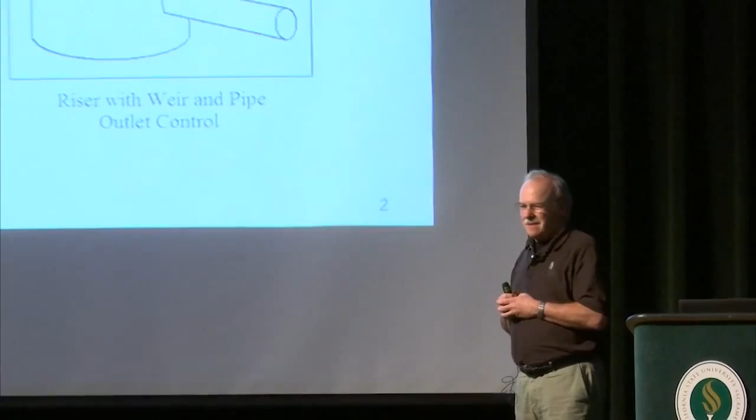Well, thank you so much for coming out tonight. It's a rainy night, and you've come to hear us talk about rain, so I really applaud your dedication. In talks like this, they say you ought to start with a joke, so I went to the internet and typed in stormwater humor, and this is what I got. Anybody get it, undergraduates? I don't either. Doesn't make any sense to me, which tells me obviously stormwater is not a laughing matter.

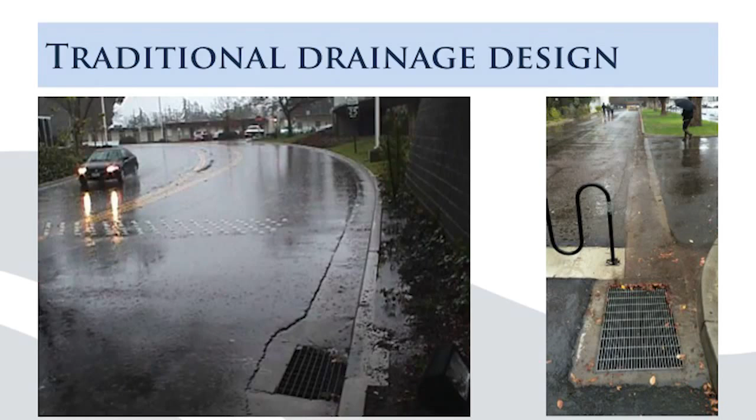And it's not a laughing matter to these folks either - these are the folks in Missouri who were inundated by those really big storms a few weeks ago. I wanted to put this up here because this is not the stormwater we're talking about tonight. I want to make sure you understand we are not talking about floods. We are talking about the rainfall we're getting on an everyday basis, and you'll see why that's important later on.

So what I'd like to do is the first part of the talk here, about the evolution of stormwater management philosophy and thought, and then we'll end with a big case study that Maureen will describe about the stuff we built on campus. Traditionally, civil engineers have... there we go.

Traditionally, civil engineers' design philosophy has been to grab the water as it comes out of the sky and move it as quickly as possible away from wherever it lands. So on a street, we'll take the runoff, move it into a gutter, move it into a drain. Here's another gutter, move it into a drain. From the drain, it's going to go into a whole series of pipes, or perhaps ditches, and then from there.

Get discharged to the nearest receiving water, a receiving water being a lake or a stream nearby. In the extreme, the engineers make the receiving water part of the conveyance system. So here's the Los Angeles River, and it kind of looks like a conveyance ditch, doesn't it? In the 1930s, floods were so bad they really needed to move water quicker out of this LA area than the river could carry it, so they ended up doing this. You might remember this from the second Terminator movie, where the Governator drives the semi-truck down the path.

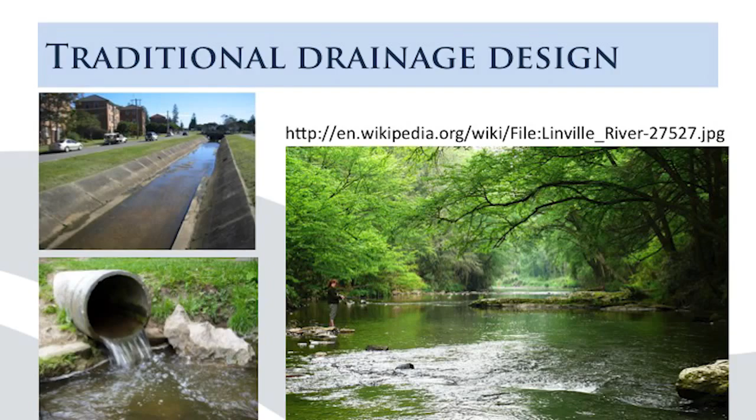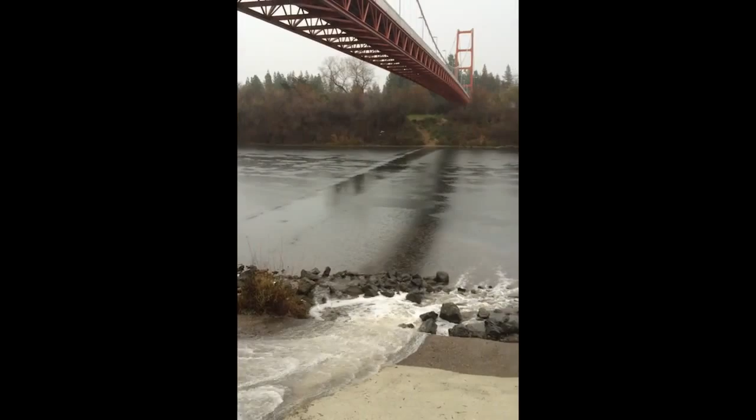Here on campus, this is how we get rid of our water. So all the water from the east side of campus comes to a pump station near the Guy West Bridge, and is periodically just pumped out down to the American River. So you get the picture here: hits the ground, into a pipe, into the river as quickly as you can.

That's the part that's changing. While it's moving from where it hits the ground, stormwater is going to pick up a variety of things.

So this is a little compendium of the kinds of pollutants that we find in stormwater. If there's extra fertilizer running off somebody's lawn, that will show up in the stormwater. People who overspray their pesticides, or even if they don't overspray, if the rain comes too soon after the spray, it'll wash pesticides into the water. Sediment from erosion, trash, pathogens from your dog or from your goose - I guess those are geese there. There's been a great proliferation of local ordinances about picking up your dog poop. This is part of the reason for that.

And then finally, our beloved cars are the sources of hydrocarbons and heavy metals. We get copper from brakes. We get zinc from the tires.

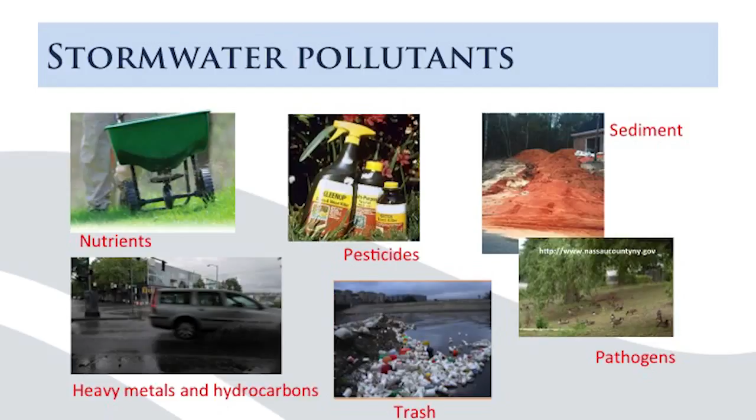On campus, the same kinds of things happen. We have a little turbidity plume over here that I caught one day after a rainstorm. This is a hydrocarbon plume. You've seen these little rainbows in the parking lots after a rainstorm. That's a little bit of oil, a little bit of gasoline leaking from the cars.

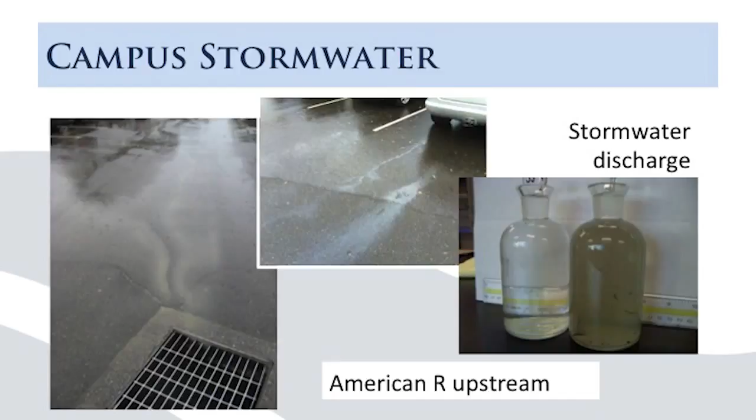And as a result, the campus stormwater ends up looking like this. So when I took this sample out of that same pipe that I just showed you, I went down to the river, went upstream a little bit, and this is what the American River looked like. It looks pristine, and then we're going to put that in it. Well, I'm not going to. We do put that in it.

So what do pollutants do? Well, some of the pollutants are toxic. The hydrocarbons, the pesticides, the metals can be toxic to fish. The nutrients are going to encourage algae blooms. The sediments are going to wreak havoc with local habitat. Trash in the water doesn't look good. And if there are pathogens, beaches close.

So in Southern California, after every rainstorm, the guys go out, they measure microbes in the surf, and if they're too high, they close the beaches. We've spent 35, 40 years since the Clean Water Act in the early 70s taking care of wastewater treatment, and we've mostly got that under control. We've mostly got the industrial discharges under control, and now we're at stormwater. And so today, stormwater is described by EPA as one of the leading remaining uncontrolled causes of pollution problems.

And our local example here is the fish in the American River. The salmon in the American River need clean gravels to spawn. So if we put a lot of sediment in the American River and it covers those gravels, the fish can't spawn. Toxins in the water are going to affect the fish, particularly these cute little baby fish which are very susceptible to metals and pesticides in the water.

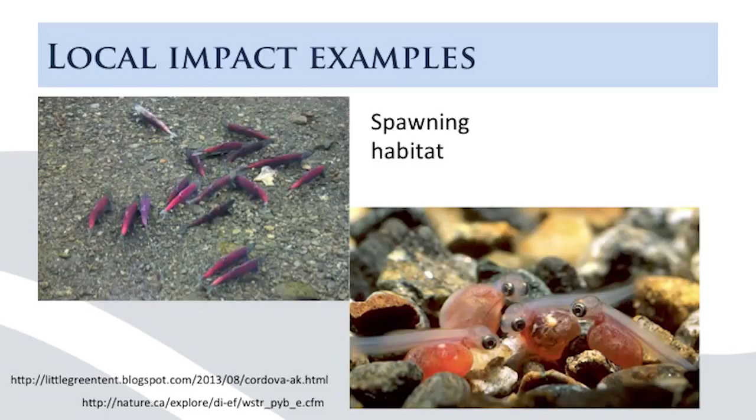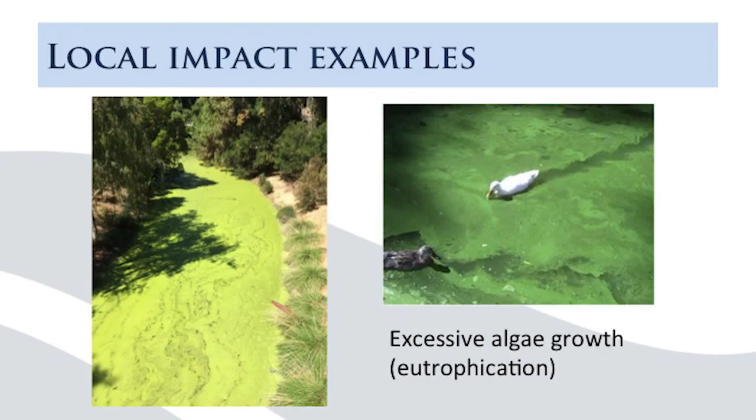At that other university nearby on the other side of the causeway, they have an excess algae problem. If you've ever been to the Arboretum at UC Davis campus, the Arboretum is a long, skinny lake that used to be part of Putah Creek. It picks up nutrients from the campus, naturally running off in rainstorms, and it spurs huge algae growths here. The ducks have to push the algae out of the way to be able to swim through the water.

So engineers, we say, you got dirty water? We know how to handle that. Treatment, we're going to treat it. And so when people started thinking seriously about stormwater quality, they started thinking treatment. And like Dr. Mahmood said, OWP was picked up by Caltrans, said, help us with this problem, help us develop some treatment technologies. And not just us thinking this, but across the country, this is what engineers were thinking. What can we do to treat this?

So we developed a bunch of different things. I'll show you a couple examples since it's a Sac State talk. I'm going to talk about the things that we've done. We helped Caltrans work out some trash screens that are designed to capture litter off the highway. This was a particularly interesting one. This is a well screen that's turned on its side.

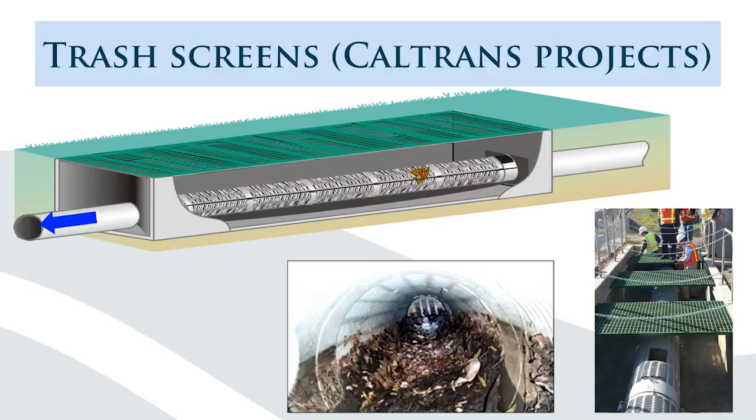And let's see if the animation works. Yeah. The trash and the water come in, the trash is caught inside, and the water goes out, which is just the exact opposite of how a well screen works in the real world. And right here, it gets pretty grody inside of this thing. They clean it out once a year. And you can get a sense of the size of it here.

Up at Lake Tahoe, we spent a lot of time looking at treatment because one of the major contributors to the loss of clarity at Lake Tahoe, in fact, I could say most, and people would mostly agree with me, but a few would argue that there's some algae, but it's mainly small particles running off with the stormwater. From everybody's household, every street running into the lake is hurting the clarity. So we spent some time with Caltrans trying to develop alternative treatment technologies.

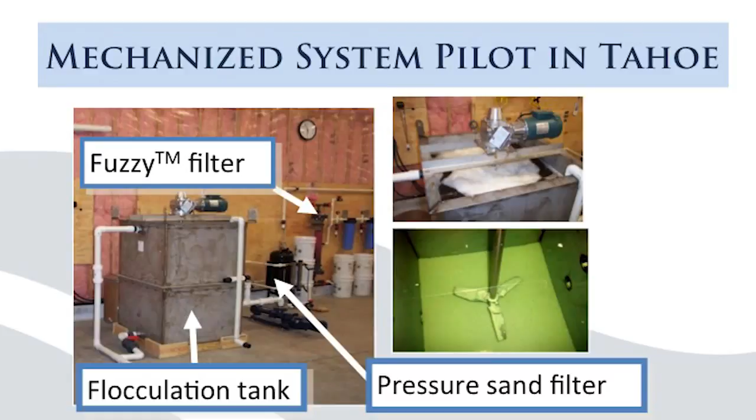This is a really highly mechanized one. This looks like a treatment plant, like a water treatment plant. It's got a chemical coagulation tank. We had a couple different filters that we were trying, and then even some ion exchange, reverse osmosis stuff back here.

We did a lot of work, and when I say we, I mean us and contractors employed by Caltrans. I don't want to take credit for Dr. Curtis there from the University of Nevada at Reno, who did a lot of studies on different media to take out not only the dirt, but also phosphorus, which was thought to be a contributor to algae growth at Tahoe. And you can see up here, it can work pretty well. This sand was so-so. This other media called activated alumina worked really well.

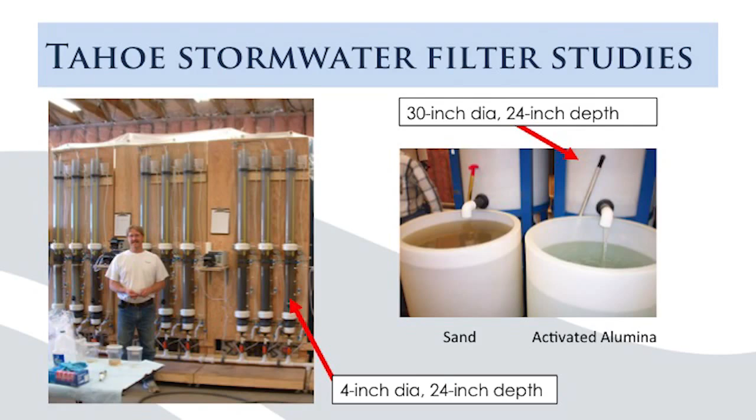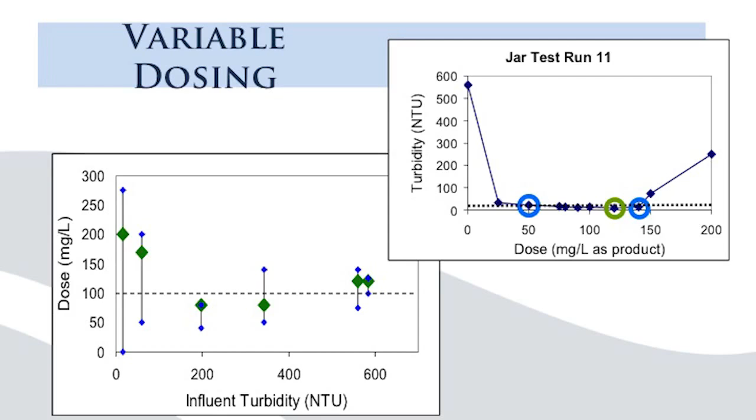So if you're thinking about putting something out on the side of the road and just turning it on and walking away, you got to think twice about that, because you need somebody there to see what's going on.

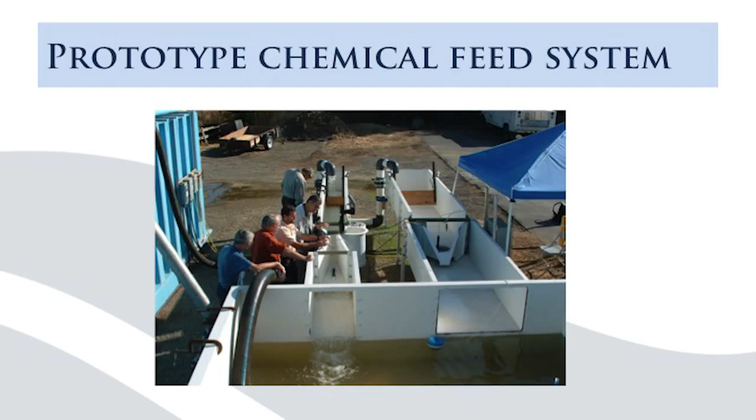Here's a prototype, a chemical addition system. My goodness, there's a flume here, and this was another one, a flume. So you have to measure the water and feed that information to a computer, which is going to turn the speed on a pump so it puts in just the right amount of chemical. It's kind of a complicated device. Great in a treatment plant, not so good on the side of the road.

Keep pressing the wrong button.

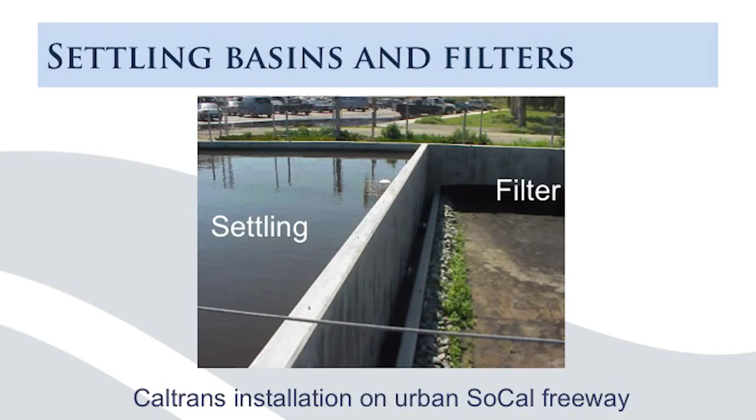And here's a little close-up. This is one that's actually in operation, and it's settling on this side, and the water's coming out toward the bottom of this wall. You can see it's watering the plants here, but it's also going into the sand, and it really works reasonably well. The problem is it looks pretty daunting, doesn't it? It's a big, concrete, expensive box.

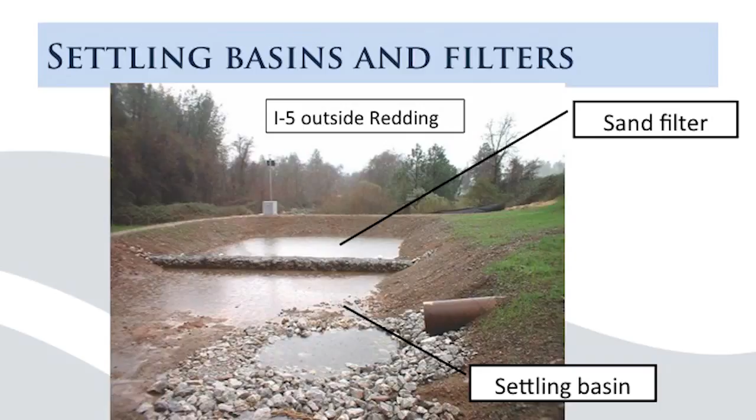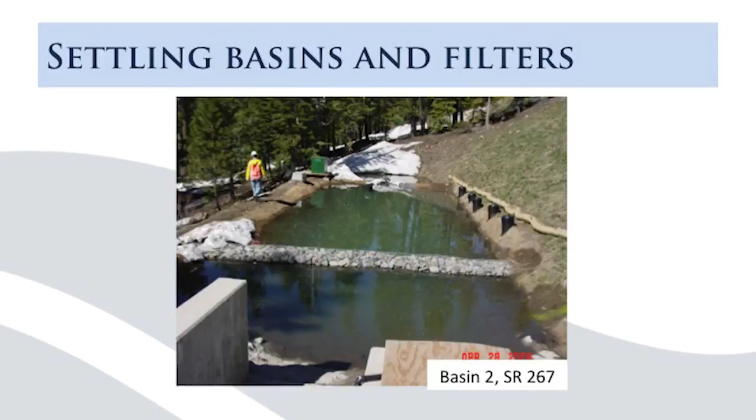All right, so I've kind of telegraphed to you the issues. In treatment, footprint is a big issue. I mean, think about how many drains there are out in a highway system or in a city. Operational challenges. If every storm is different, you need to have somebody nearby or somebody to control it, and that's difficult because how are you going to hire these people? How are you going to get them out to all these different facilities? How are you going to get them up and running within 10 or 15 or 20 minutes when you know a storm is coming? These things are all expensive too.

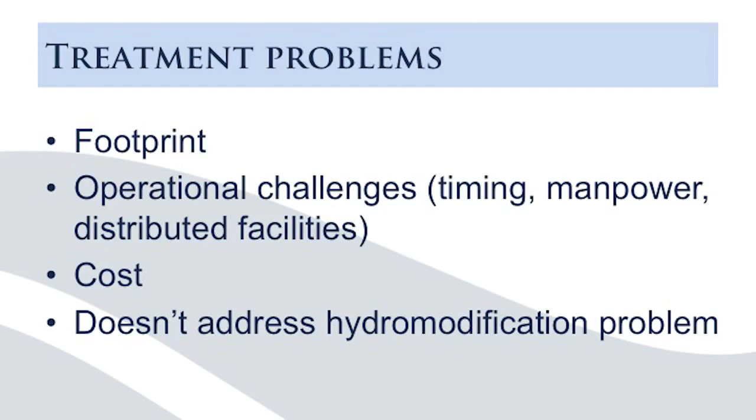And then it doesn't even address one of the big problems, which I haven't told you about. So when stormwater hits and runs off and is sent off to the receiving water right away, it doesn't just carry pollutants, it changes the hydrology of the receiving water. So what I'm talking about here is, if you look at an undeveloped piece of land, rain falls on it, and these are just some typical numbers from EPA, half the water goes into the ground, 40% of it evapotranspirates, and 10% runs off.

We build a city, we put down pavement, we put down buildings with solid roofs, we put down plazas and shopping centers, and now when water hits, very little of it goes into the ground because what we've done is cover the ground with an impervious surface. Most of it runs off, not so many trees, so not so much evapotranspiration anymore.

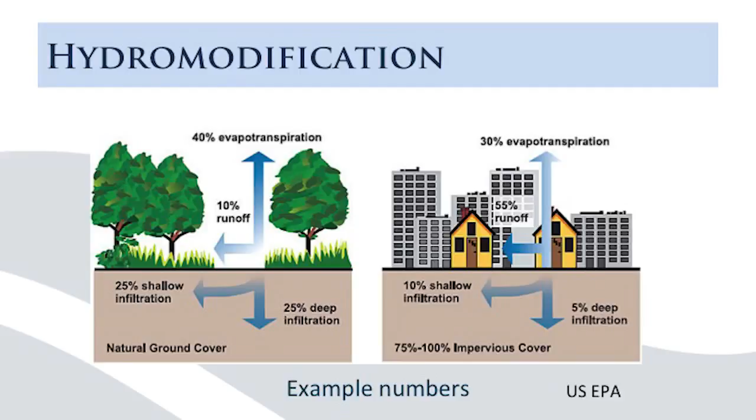For the receiving water, this is the result. Before development, you've got a hydrograph here, which is the runoff flow as a function of time, that climbs very slowly as water infiltrates into the ground and then starts to run off. And then after the storm, it slowly drains away. We replace this with a development, and now the hydrograph looks like this. Bam, right up, bam, right down. Higher flows, faster peaks, faster drawdown, more erosion, more flooding, less infiltration.

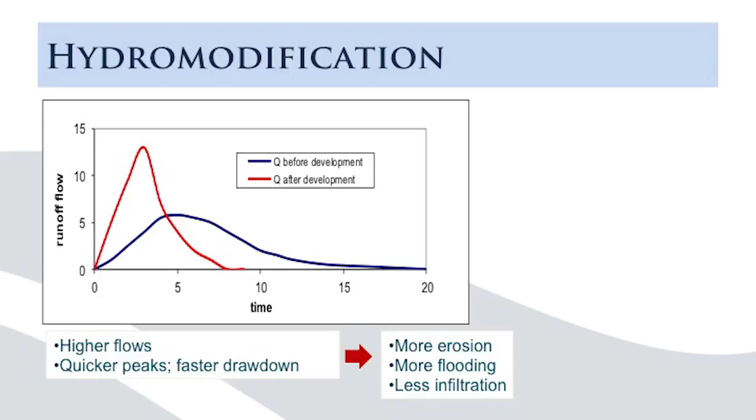So that's a problem downstream because you get more of this happening. So streams that have developed based on old flows, nice and even flows, all of a sudden get hit with these big runoffs, and you start developing erosion problems.

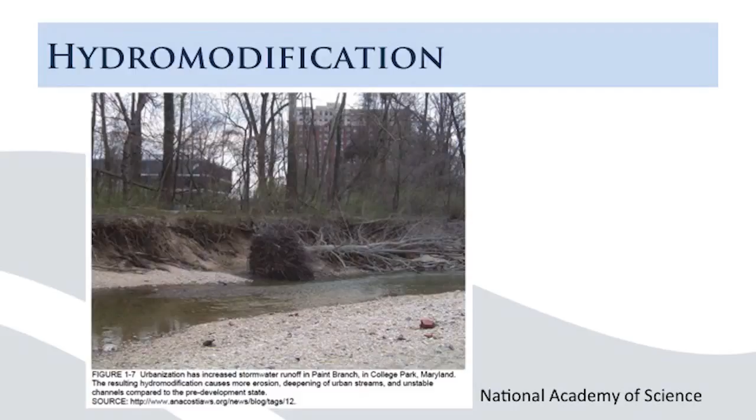You also develop problems the following summer. Okay, so here's a little cartoon that says if we have a pervious surface, grass or forest, the water goes in, there's a local groundwater table, and that groundwater exfiltrates into the local streams. So the streams can run during the time after the rainstorm. I mean, in California, it doesn't rain in the summer, right? But you do see streams that are running year-round, and this is where they get their water.

If you cover up that infiltration surface, the groundwater starts dropping away, and there's less water going into the streams. So all this hydromodification is a bad news scenario for the fish and the other critters in the receiving waters.

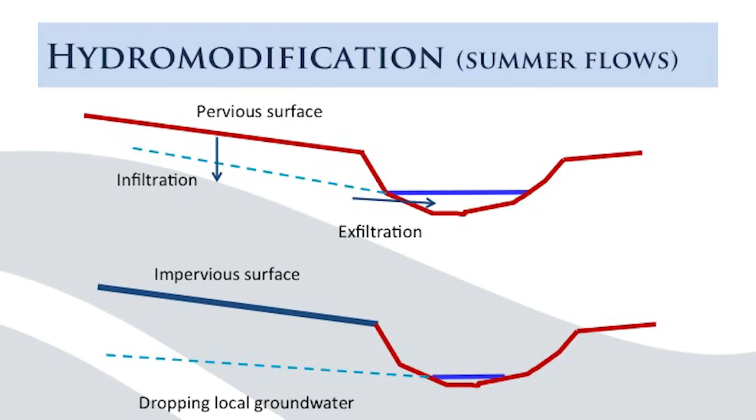So having thought that through, the combination of the hydromodification and the treatment, folks, not just at Sac State, but all over the country, and in fact, all over the world. I recently saw a website from China talking about their Sponge City program, where they want to implement what's called low-impact development. And the strategies of low-impact development are to try to mimic the natural hydrology. So try to get that red line I showed you back to the blue line.

We're going to do that by reducing the impervious surfaces, capturing the stormwater near the source, near where it hits the ground, and trying to infiltrate as much as possible. Where we can't infiltrate, we're going to treat it. And where it's too big to treat, we are going to route it away as a flood.

So I'm trying to tell you that low-impact development doesn't mean we're going to capture all the water and store it in your front yard until your house is flooded. When the engineers are going to design these things, they're always going to design them for a high-flow bypass. And I'll show you some of these pictures.

The reason we can get away with this, or what really makes this work, is the fact that most of rainfall actually falls in relatively small doses. I mean, if I said, what's the average size storm, you would probably come up with a pretty good sized number. But if you take, in this case, 36 years of rainfall in Modesto, and you plot it up so that you've got the cumulative percent of the total rainfall that's smaller than these storm sizes, you get a situation like this where 86% of all of the rainfall falls in storms that are smaller than an inch in 24 hours.

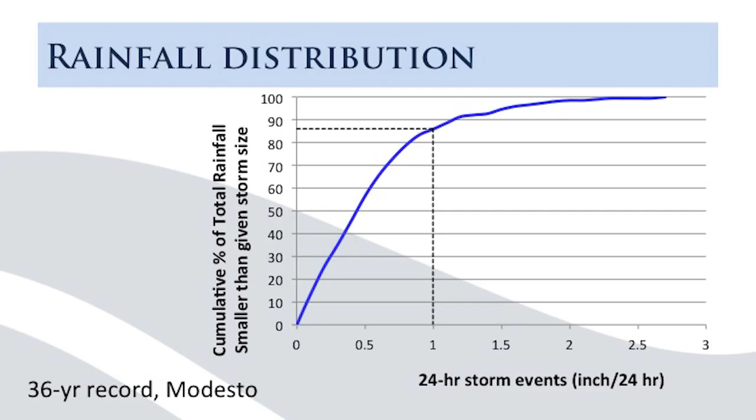An inch in 24 hours is not a flood flow. It's a flow that you can handle with a much smaller facility than a Folsom Dam or a giant storm control basin or flood control basin. And that's what makes us optimistic about LID, because even though we're not going to ever try to get these guys, in here we're going to get 85. We're going to make an attempt to get some kind of treatment on 85% of the runoff.

So we've developed a whole bunch of practices, and I won't go through this whole list because I have some pictures to show you of these, but you might have heard, and you will hear Maureen talk about bioretention and rain gardens. You might have heard people talk elsewhere about green roofs or rain barrels and changing out the vegetation. These are all tools in the toolbox for LID. So let me just illustrate a few for you.

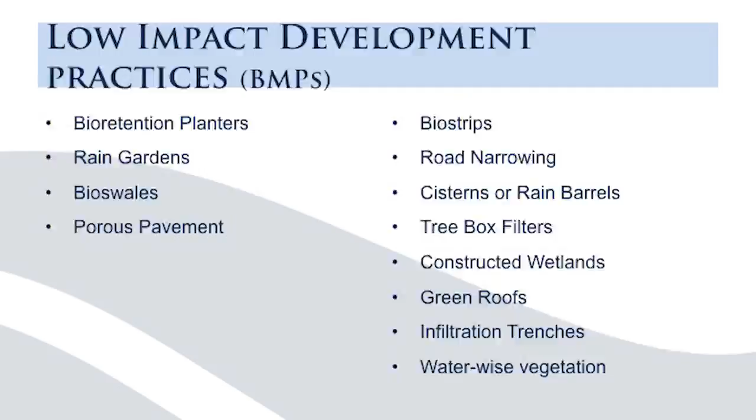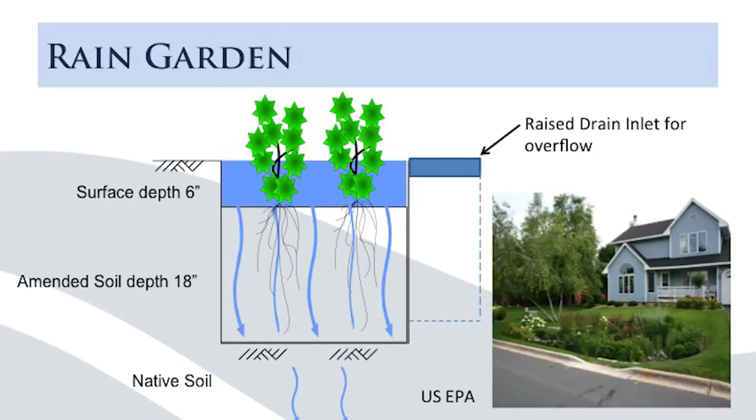A rain garden is a depression that we allow to fill up, and then the water will go into an amended soil, so amended so it has lots of infiltration. So it's usually soil and compost and sand mixed together, and then eventually it will drain away. I didn't catch it, but if it's too high, of course, it goes off back into the pipe system. Here's a rain garden that really is a rain garden. Maureen will show you some others today that don't look like somebody's garden.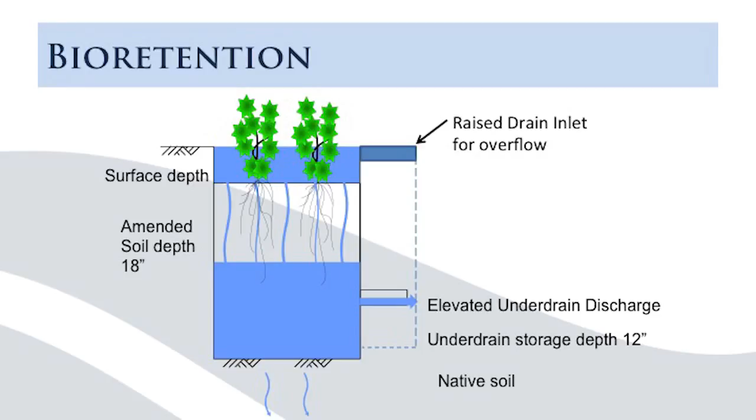But now it's gone through 18 inches of soil, so now we're not talking about dirty water, we're talking about much improved water quality. And any water left on the bottom here will infiltrate away later between storms.

Here's an example of one at a parking lot. The water coming off the parking lot fills up, and if the storm is too big, it overflows into the drain here. The underground pipes attach to this drain box as well.

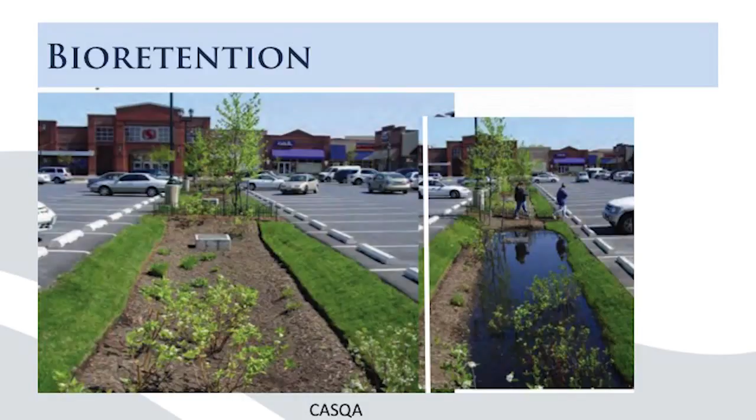You could do these on a small scale basis. If you're in the middle of San Francisco, it's going to be tough to build some of these, so you might just do them in terms of planter boxes. Same idea: there's an underground drain and some filter material.

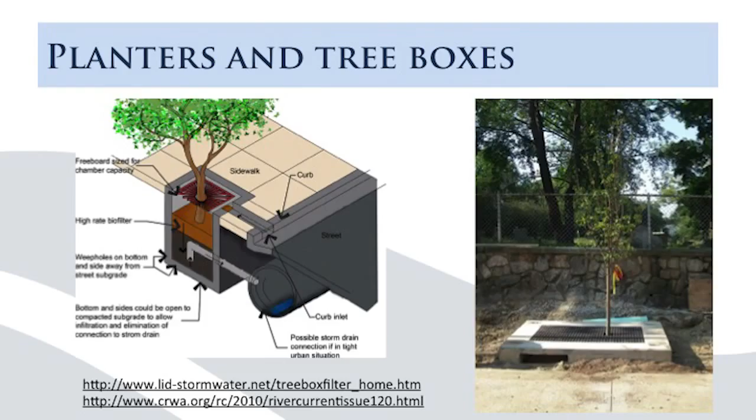Or if you're really pressed for space, you might actually just do it with a single tree. The water comes off, down through the tree, gets caught by the pipe, and off to the drain system. But the difference is it's been treated now through 18 to 24 inches of filter material.

Now, we said reduce the impermeable surface. What if our pavement, our impermeable surfaces, actually let the water through? People have developed what's called porous pavement, and of course, concrete pavers.

We'll show you a video of this later on. This is great, it looks like popcorn. It holds substantial loads—not high traffic loads, but parking loads, plaza loads, walkways—and water pours right through it.

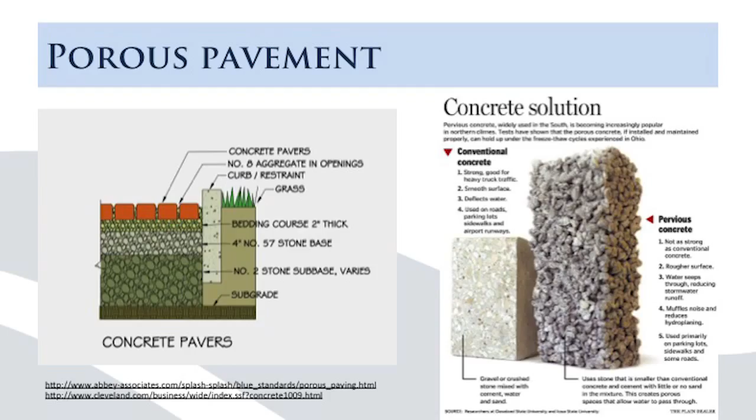You see where we're going here? Capture the water, let it infiltrate.

Over in Davis, where I live—so I have examples from Davis because I happen to live there—they don't even bother with the pipes. They just run the water across the surface and into designated areas on the ground.

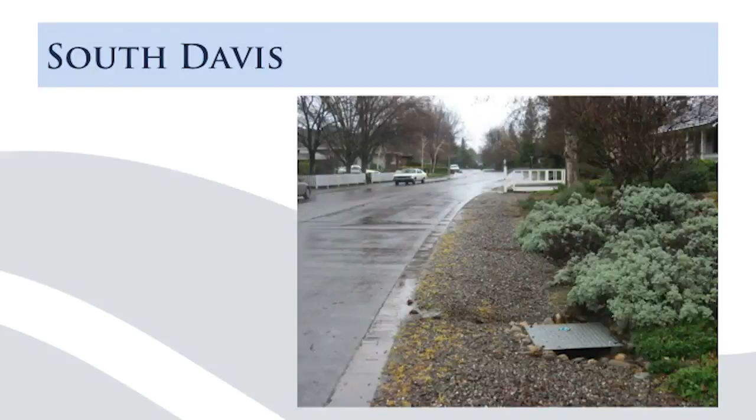So are all the problems solved? Well, I mean, it looks good. No, there's still problems—there's certainly questions here about treatment efficiency and BMP design details.

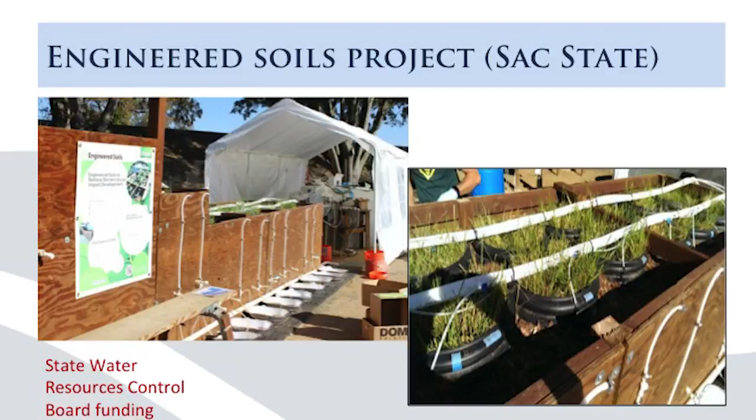At Sac State, we just did another project, a Proposition 84 project on engineered soils. What we did is we built some little baby filters here in a big box, and we put different soil materials in each one. And then we ran stormwater through it.

So in a storm, the professor gets to stand underneath here and look at the pumps, but the students stand out in the rain and collect the samples. This is influent—this is the untreated water. Here's the treated water.

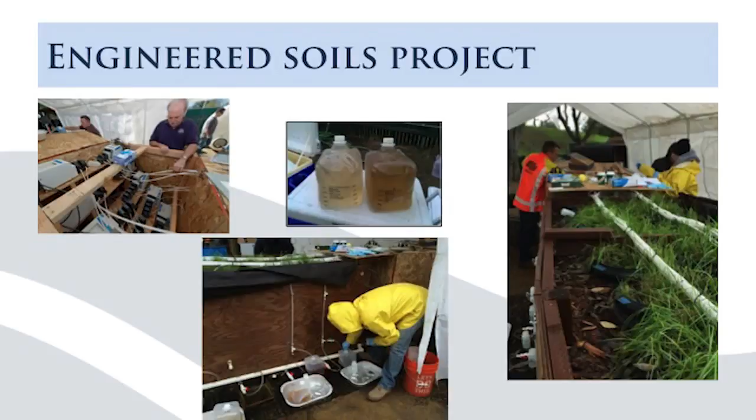And what we were looking at is different materials for this brown layer, and we were looking at this white layer. You remember that activated alumina stuff I showed you at Tahoe? It's really good about picking up phosphorus, and that's what we were trying to do. So we were looking at phosphorus reduction, and then we were looking at low elevation outlets versus high elevation outlets, which make an important difference in nitrogen removal.

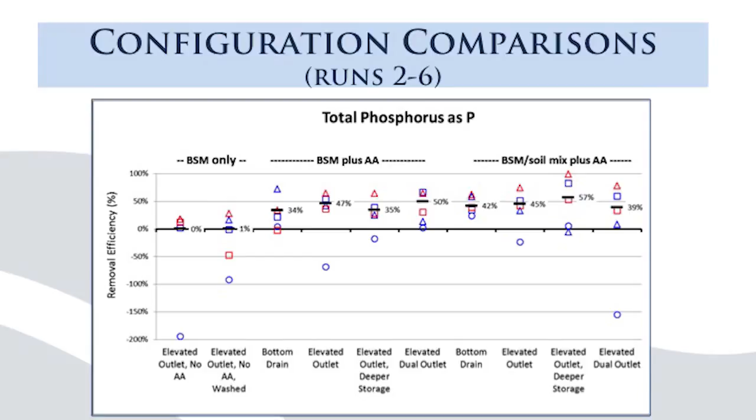I won't tell you much about this in the interest of time, but basically, look, there's no AA on these guys, no removal. And all the ones that have AA, here's the removal rates: 50, 60, 40%. On the nitrogen side, the bottom drain has no nitrogen removal or low nitrogen removal, while elevated drains have higher removal rates.

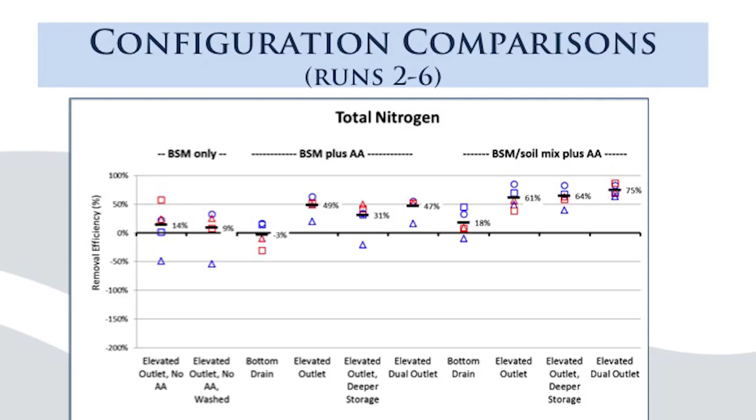So this is the kind of data that we collect that are going to help us refine our designs in the future.

The other really big problem, and I'm going to turn it over to Maureen now to tell you about this, is the fact that we've got a whole city here that doesn't have this stuff. And the question is: is it going to be easy to put in or hard to put in? That's what we were trying to do here at campus. So let me turn it over.

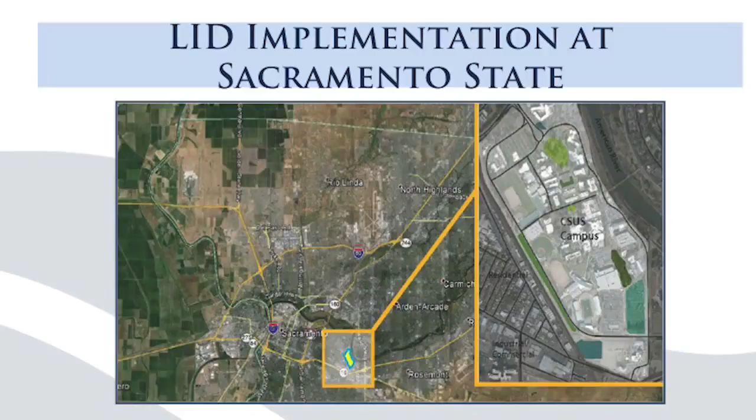And that stormwater, at least on the east side of campus, is all brought together and discharged here. We had that really cool video we saw earlier, right into the American River. Over on the east side of campus, it goes to the river; west side of campus goes over to the west ditch, which eventually ties over to the city storm sewer system.

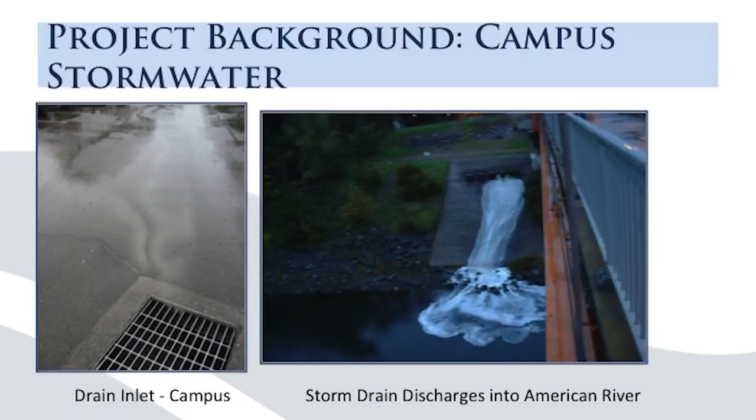Okay, so then once we've collected all the stormwater from campus, it goes out through the outfalls at the Guy West Bridge, into the American River. Now, the American River is really known for its pristine, beautiful water quality. It's really pretty good overall.

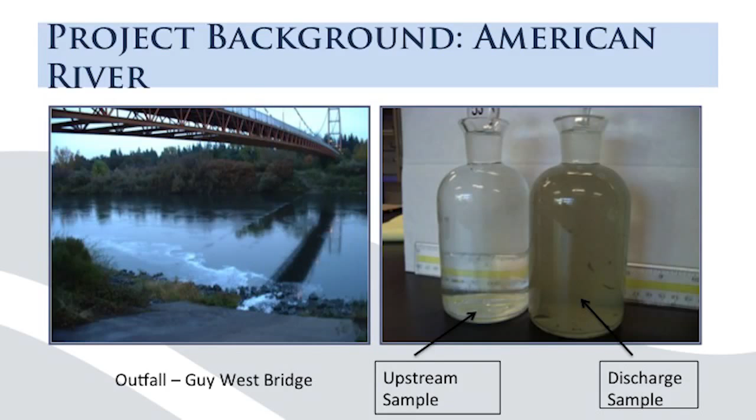Here's a nice upstream sample, like Dr. Johnston said, and then during one of our storm events, this is what we're sending out there. Now again, think - that's just us on campus. Think of all the other dischargers up and down the river and the impact that's having on the larger scale along the whole river.

Okay, so the project I'm going to talk about, I fondly refer to it as the Campus LID project. It came about from a whole lot of collaborators, a lot of support from agencies as well as individuals. Funding was available from the Prop 84 Stormwater Grant Fund from the State Water Resources Control Board.

They provided the money and the city of Sacramento was awarded the grant. The city of Sacramento just recently released some of its latest low impact development standards throughout the region to be used by different developers. So we collaborated with them to use those standards and do some demonstration on campus for this kind of retrofit scenario that Dr. Johnston just talked about.

Retrofit can be expensive, it can be difficult to think about putting and tying it into the existing infrastructure. So Office of Water Programs was fortunate to get to be the hub of the whole project, collaborating on everything from grant management, project management, working with the city and the state board on that end of things. We also collaborated with the city and facilities management, who are contractors for design and construction oversight and reviews. We have students and our office professionals working on monitoring and data evaluation to look at the performance.

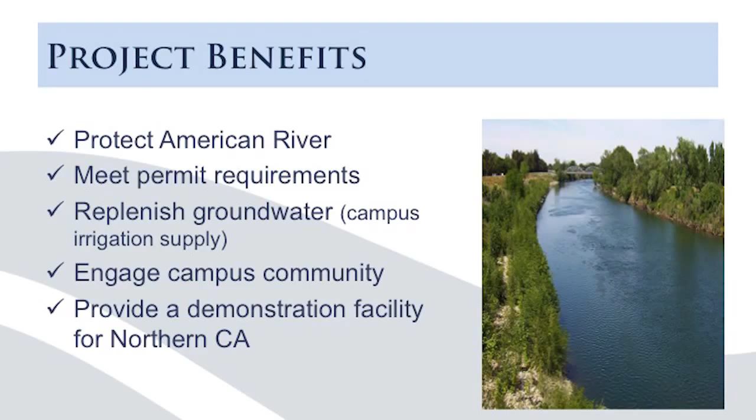Stormwater as a resource, engaging the campus community. I'll tell you a little later how we have a whole bunch of students working for us, as well as opportunities for folks like yourselves to come hear about the project, walk around campus and see these things in the ground, and learn more about stormwater management. It's also an opportunity for professionals, managers, and planners in the area, and throughout California, to come see these things in the ground in Northern California.

Okay, so how did we go about figuring out what we wanted to do and what types of BMPs? Dr. Johnston showed you a whole slew of different opportunities, and the campus is pretty big. There's all kinds of opportunities with impervious surfaces, rooftops, parking lots, streets. How do you possibly choose?

So we went through, well, what are the biggest goals, what makes the most sense? It was really kind of a bang-for-the-buck approach: large drainage areas, parking lots, streets, rooftops, and even existing landscapes. Sometimes the turf or grasses you see are not as permeable - they can actually be a little tight, and stormwater will just run right off them instead of soaking into the ground, if you compare it with different types of land cover or vegetation.

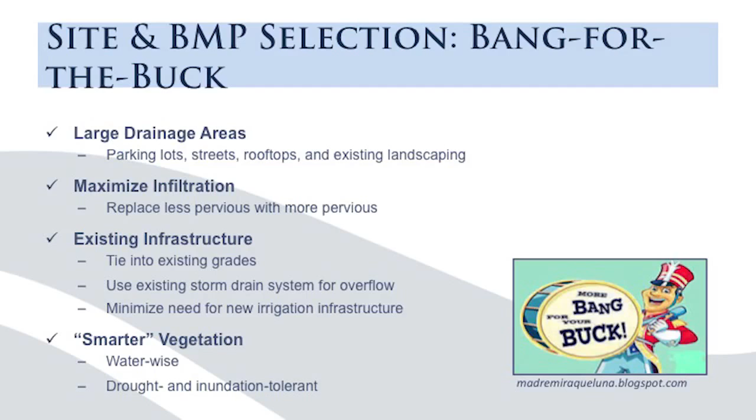Maximize the infiltration, replace that less pervious surface with more pervious surface. Tie into the existing infrastructure - that's the most cost-effective situation, but I'll show you in a little bit, it's pretty difficult. We want to use the existing storm drain system for overflows. Like we were talking about before, with these smaller storms, but there are bigger storms you're worried about for flood control - somehow you're going to have to deal with those.

You're not going to be able to design a facility big enough to handle those big flows, so you want a way for the water to overflow and still get out and over into the river. We also wanted to make use of the existing irrigation infrastructure.

A lot of times you hear about the soils and the physical layout of the facility, but a big part of this is the smarter vegetation. It's water-wise—you're putting in plants that don't have a lot of water demand, and also drought and inundation-tolerant plants. These plants can survive the really hot, dry summers we have in Sacramento, and then when it rains, they have to sit in these depressed landscapes, these gardens, for up to 48 hours and still survive that inundation.

So those are the things we're looking at. We were able to go around campus and look at all the opportunities to choose from those things I talked about. We ended up with a variety of locations throughout campus, so as people are walking around, they'll see rain gardens in different spots, over in the parking lots and at Jed Smith, you're going to see different things. One of the goals was to provide these throughout campus, as well as have a variety of facility types.

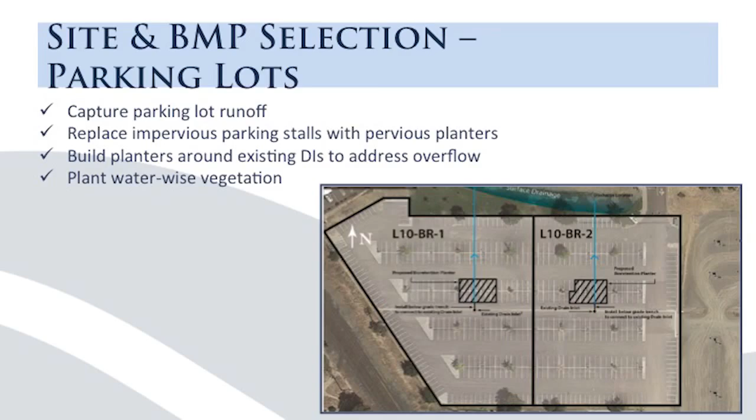We replace the impervious parking stalls with pervious planters, building planters around the existing drainage inlets so there's an overflow option. I cut the asphalt out and depressed the landscape a little around the existing drainage inlet, so water comes from the parking lot and enters our bioretention planter, starts ponding up a bit. Because the inlet is raised, if it fills up too much and isn't infiltrating all the way, it still has a means of overflowing into those drain inlets. And then, of course, we plant the water-wise vegetation.

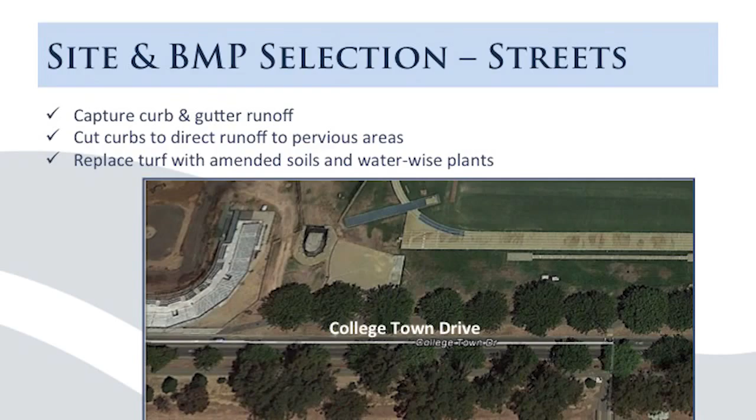Over on streets, it's a similar concept with the water-wise vegetation, but in this case we're looking at curb and gutter. Most streets have a curb and gutter design where the runoff follows parallel with the road and then finds a drain and dumps in. We had a couple of locations with turf landscapes right up along the curbs, so we were able to cut those curbs and replace the existing soils and landscape with amended soils, as Dr. Johnston talked about—engineered soils, a mix of sand and compost, specifically designed for treatment and infiltration capabilities, along with those water-wise plants.

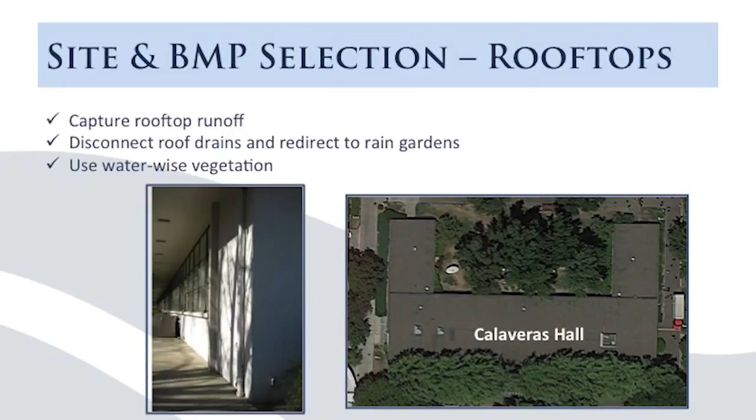For rooftops, there are a lot of facilities on campus with older buildings that have roof downspouts tied directly from the roof down underground into the existing storm sewer system. One popular strategy is to disconnect impervious surfaces—so we're disconnecting the downspouts and putting in rain gardens, so the water comes out and has an opportunity to infiltrate and be treated in those rain gardens.

Okay, so lots of challenges.

Once we had these concepts of the type of BMP we wanted and where we wanted to put them, how were we actually going to get them in the ground and put the design and specs together?

A lot of challenges with fitting into the existing drainage system horizontally. Over in Lot 6, we were considering putting a rain garden there, and we found that it didn't make a whole lot of sense to do.

The existing drain inlets are right in the middle of the traveled way. We'd either have to move the existing drain inlets over into parking stalls, which could be costly, and it doesn't make sense to put a planter in the middle of a traveled way.

Over in Lot 10 and Lot 7 more so, the drain inlets were a lot more conveniently located. You can't see it, but the parking stalls run this way, so the inlets over in Lot 7 are right in the middle of the parking lot.

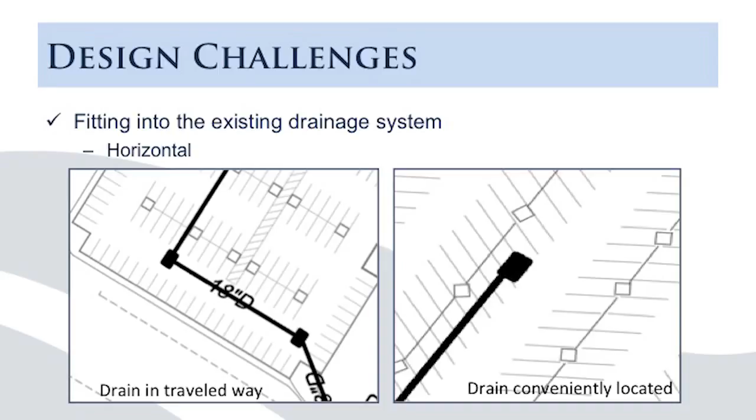Conflicts with other infrastructure. As we were looking around, we found our existing storm drain, which you can't see very well, right here - existing storm drain, existing storm sewer - that would be a great place to put it.

There's parking stalls here, but wait a minute, there's a light right here, a high pressure gas main right here, a water line that's not showing up, electrical, communications. It's just way too close to start dealing with those utilities.

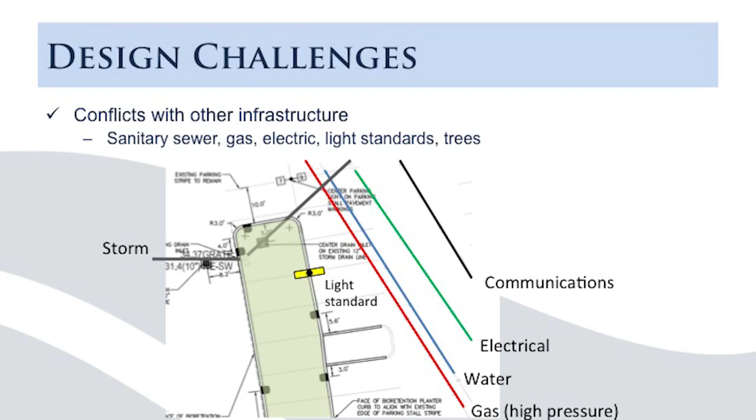So we had to work around, and in some cases abandon, initial plans that we had. In other cases, we had to redesign and put in some funky geometry to go around those obstacles.

Interactions with buildings. Especially when you're dealing with disconnecting a downspout, you have to be concerned about the impacts you're going to have on foundations.

We don't want the water coming in and impacting the building foundation here. A lot of places, like the City of Sacramento, require a minimum of a 10-foot separation between the building and the planters themselves. One of the other challenges as we tried to identify specific locations is that there are some great opportunities.

But sometimes the piping, the downspouts, are right in the middle of the building, and that can be a little bit of a challenge to access, and costly again.

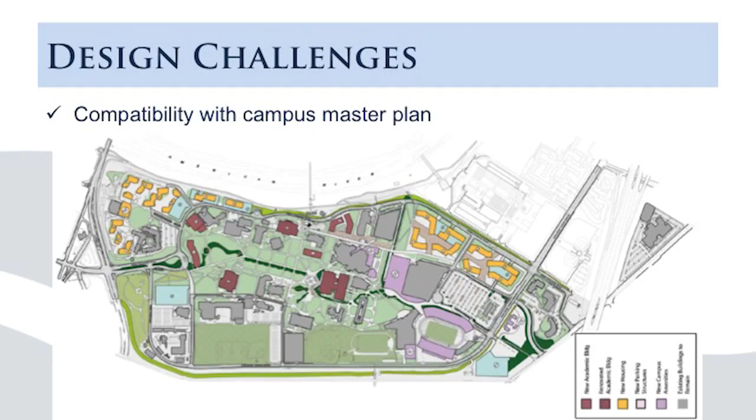Probably another one of the big challenges we had was compatibility with the master plan. When we started the initial conceptual ideas and preliminary designs for this project, the campus master plan was just getting finalized, but at the time there were still three different versions out there.

So we wanted to put these bioswales over in Lot 1. We were ready to go with that idea, and then we found out they're going to put a parking structure in Lot 1.

And we wanted to put some other facilities over in, I think, the southeast part of campus, where now they're going to put an event center, supposedly. So we had a lot of back and forth working with the long, 20-year long-term goal for the campus.

Okay, so finally we got through all those hurdles. We had some really good designs, we were real excited about them, and then there were construction challenges.

My images aren't coming through very well, but even though we talked about having to negotiate around some of those utilities, utilities are not always where the as-built drawings show they are. So we ended up having to negotiate around those.

Sometimes we had to reduce the size of our BMPs, and other times we ended up with kind of funky geometry to move around them.

In one case, there was an irrigation line at the very beginning of the project that was much shallower than we anticipated. It broke, found a path of least resistance, and flooded a couple of excavations downstream.

Fortunately, those excavations drained within about 24 hours, by the next day, which was really good news for us because it means our soils infiltrate really, really well. So it worked out. It's okay.

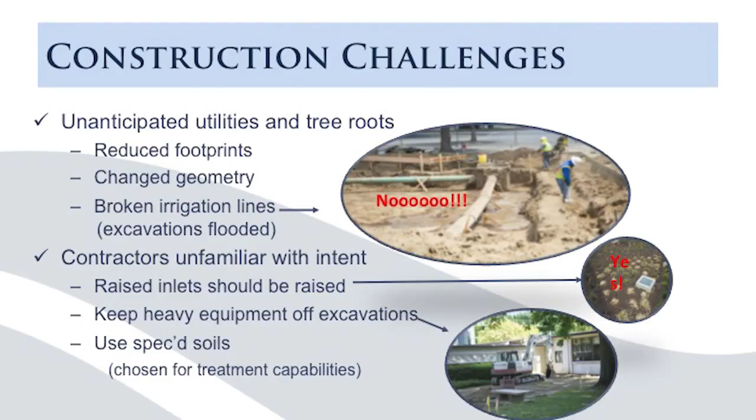You also want to be making sure the contractors are using the soils that are spec'd. These are engineered soils. There's all kinds of studies that have been done. There are more that need to be done about the mix of sand and compost for removing pollutants, for the filtering and adsorption properties. Contractors don't understand that what we said is what we really want. So a lot of times in this project, there were a lot of requests for substitutions of those materials.

Okay, so now I wanted to show you some construction photos and talk a little bit more about construction. It's a $3.3 million project, a lot of money, and not a whole lot of facilities if you think about it. And just wanted to show you how much really goes into these facilities. It's not just a matter of what you're seeing on the surface.

So for example, over in, I think this is lot 7, we started out with a great big parking lot, had to come in and saw cut and start excavating those soils out. Had to build forms around to put in a concrete wall. The wall goes about 3 feet below grade, so that helps to provide structure for when a vehicle comes over and is going to park right next to this planter. There's going to be support so that the soil underneath isn't going to just cave into the rain garden below.

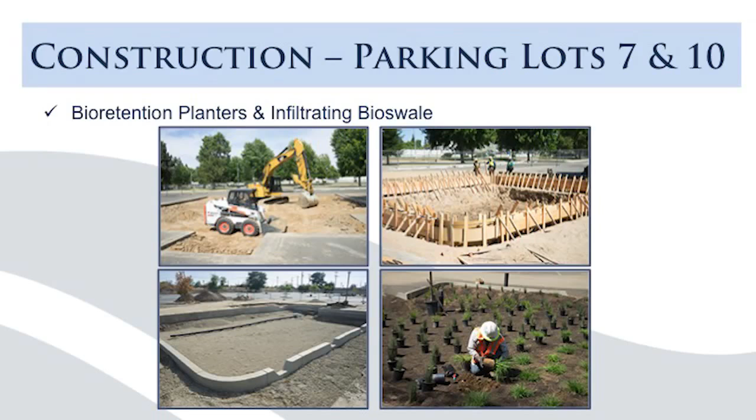So here's a picture of the formed concrete, and they've started filling it in and putting in, I think those are some of the irrigation lines. And then we're starting to plant a whole lot of different plants going in.

Over on Jed Smith, we created a green street. It's comprised of porous pavement and rain gardens. So we went in, again, had to do some saw cutting. On either side, we removed the existing asphalt and put in porous pavement. They're putting in forms here for pouring concrete to support the existing rain gardens and some of the porous pavement areas. That's just some more of the forming and excavations, and then finally a whole lot of planting again.

Calaveras Hall, over where we were capturing roof runoff. This one is an example of the roof drain coming in. The contractor cut it off, and then this is where it had initially tied into the storm sewer below, so you're capping that off, and then we're putting rain gardens in here. Here's an example on the back side of Calaveras where we've put in a valley gutter, so the roof, now that it's disconnected, the downspouts direct the stormwater into that valley gutter. This eventually gets filled up with those engineered soils for infiltration and then the planting.

And then over on the other side of Calaveras Hall, this is where the facility, the rain garden was right next to the building. We couldn't get that 10-foot setback, so we ended up completely lining the facility and putting in one of these kind of concrete boxes. And so instead of infiltrating, it's really more of a filter type device.

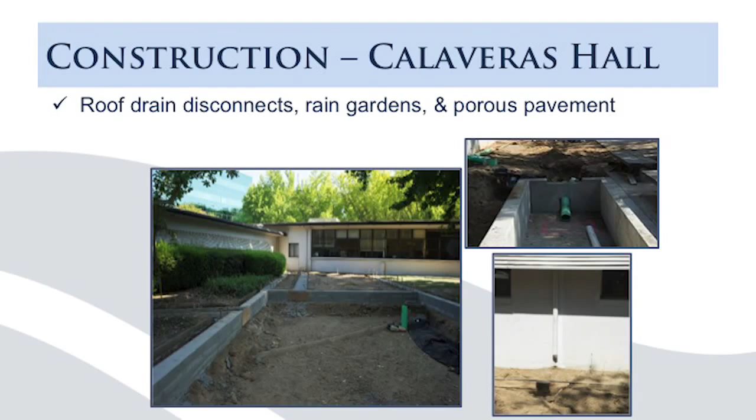Over on Library Green and Campus Grove, Campus Grove is the term I came up with. It's over at the Riverfront Center. We have those raised inlets with the rain gardens, and we also have a nice porous pavement strip along one of the walkways that replaced decomposed granite.

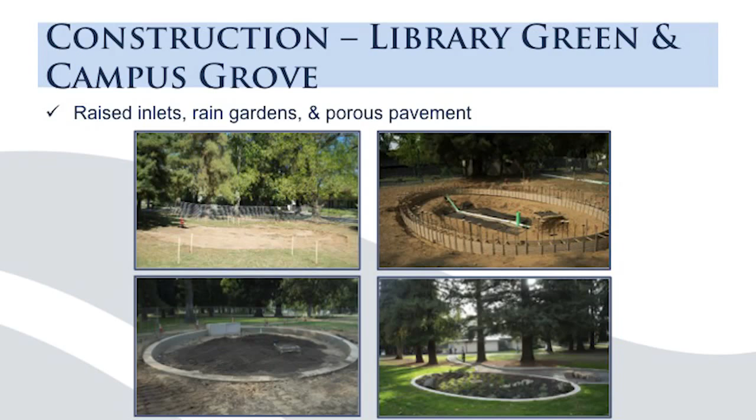So initially, it was just kind of a turf area, started doing some excavations, started forming around, had to do a little bit of cutting around the existing inlets, putting in some new piping for underdrain as a kind of a fail-safe in case our facilities don't completely infiltrate and we start having more ponding up on the surface. We have valves in here that we can turn on, and then this is a perforated pipe that'll carry that water out to the drain inlet through the storm drain. Formed and filled, and then we started planting and the porous pavement.

College Town Drive, this is where we're capturing street runoff. So there's conventional curb and gutter and some turf landscaping along there. I really like this one because it's kind of the simplest thing that you can possibly do, and there's so many opportunities for it everywhere. All you do is you cut your curb out, you put in some amended soils, and then you plant it with some water-wise vegetation.

Okay, so plants. The landscaper on this had a whole lot of opportunities for showcasing a variety of plants and a combination of those plants at all the different locations throughout campus. They chose all kinds of, it just planted in fall, but pretty soon, there's a couple of these flowers that are starting to come up as of a few weeks ago. A whole bunch of different flowering type shrubs. There's grasses. There's different heights, different colors of the greens, the flowers.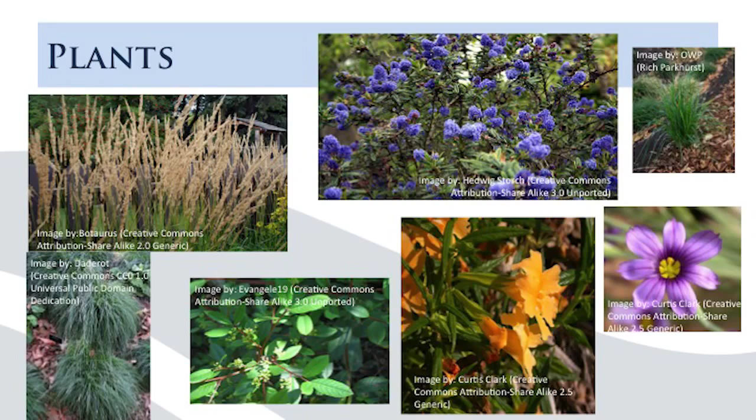They also put them in these neat designs where it almost looks like, as they fill in more, you'll actually be able to see some wave patterns representing water flow. We do have a list of these plants available. They're on our website, and I'll show you that in a little bit.

Okay, so you plan, you design, you build, and then you need to maintain. Very, very similar maintenance requirements to traditional landscaping. Remove weeds, litter, and debris. You don't want debris to be getting in. We had a lot of leaf litter this year, filling up, and you don't want it to be covering your drain inlet in case you do have overflows that you need to pass through.

Integrated pest management techniques. We don't want to be introducing fertilizers, pesticides, or herbicides. We don't want to get those into the American River. So it's really a lot of hand weeding and inspections and observations and prevention. Inspect for erosion and sediment issues, and then fix those issues if they're identified. Inspect for infiltration. Want to make sure that these soils are pulling the water down within 48 hours. They were designed to do so.

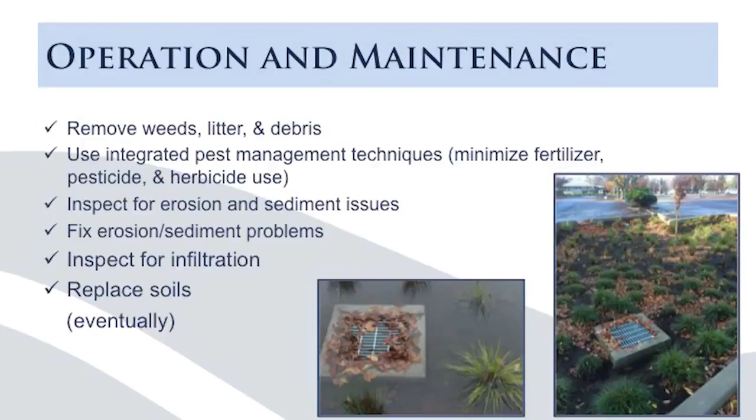If the water ponds for, say, 48 to 72 hours, you have vector issues, those are like mosquito breeding problems. And so we're going to be watching them. So far, so good for most of the facilities. I'll tell you about the one in a second. Replace, and then long-term, 10 to 20 years, we are looking at probably having to replace the soils. There's a lot of different studies out that show somewhere between a lifespan of 10 to 20 years, but we'll continually watch that infiltration capability to see how they're performing and then replace the soils as needed.

Okay, so how are they doing now? We've had a bunch of rain. They're performing as designed. Good news, first biggest step is that the runoff is actually entering the facilities. That's great. We are having temporary ponding. All of the facilities except one are infiltrating within 48 hours.

There's one over on Collegetown Drive, one of those simple rain gardens I talked about. It's kind of interesting when you look at the National Soil Survey results. There's this perfect line that goes right along that rain garden that shows really tight clays at that rain garden, where everywhere else on campus it's these nicer, open, sandy soils. So that one we're working with facilities management to mitigate.

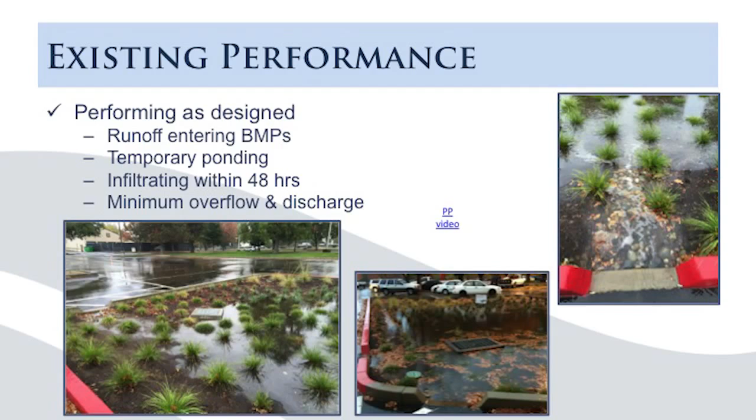And then we've actually had minimum overflow and discharge. We haven't had really these big flood flows yet, or larger storms yet. The storms that we designed for are the storms that we've had so far. So most of that water is infiltrating. And actually, I'm going to show you an example of the porous pavement. I haven't talked about the porous pavement very much, but I wanted to give you an opportunity to see it in action.

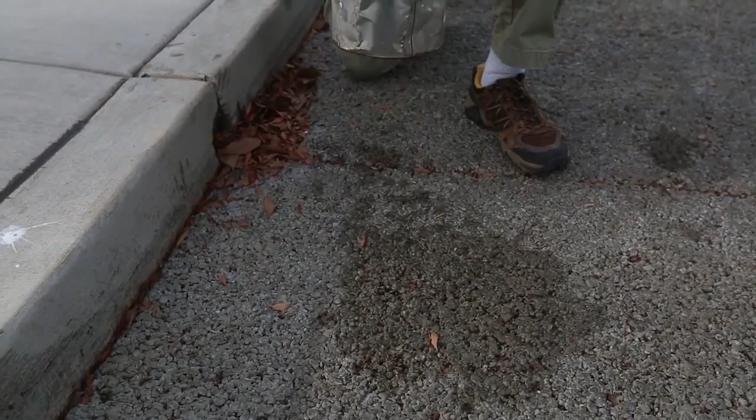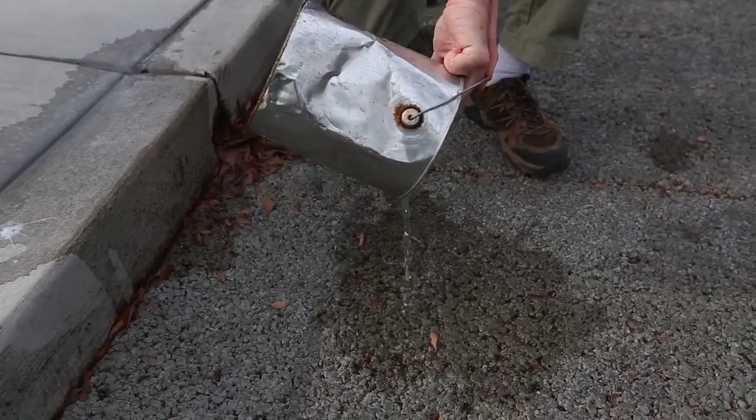Okay, so how are they really performing? What are the numbers? We're working on that right now. We have students that are helping us, civil engineering students who work for OWP in a variety of projects that we have. They're assisting with flow measurement and analyzing the water quality. We're looking in particular at different sediments, pesticides, and metals. Those are the pollutants of concern for the American River. And then the students are also going to be helping with data evaluation and reporting.

And our students really get into their work. I thought you would like that one.

Okay, so we have a lot of education and outreach opportunities, and we've done a lot, and we have a lot more that we're going to do, so you guys continue to learn about what we're doing, what's the latest in stormwater management, and even more about these facilities. For instance, I have my computer science students represented in the house, and they are working on a mobile app for a self-guided walking tour, so you can walk around on campus. It'll guide you from one BMP to the other. It'll tell you a little bit about the design, some of the schematics and pictures, what it looks like, what plants were used at the different locations.

We are working on signs right now. You might have seen we had some smaller 2x3 or so signs that were at the different BMPs. We're going to put in some of these really nice wood signs that are 3x4 size with a lot more detail, schematics, plant types, where you are on campus, a little bit of narrative of what the BMP is about. Opportunities like this, the STEM lecture, we're doing different professional conferences throughout the state.

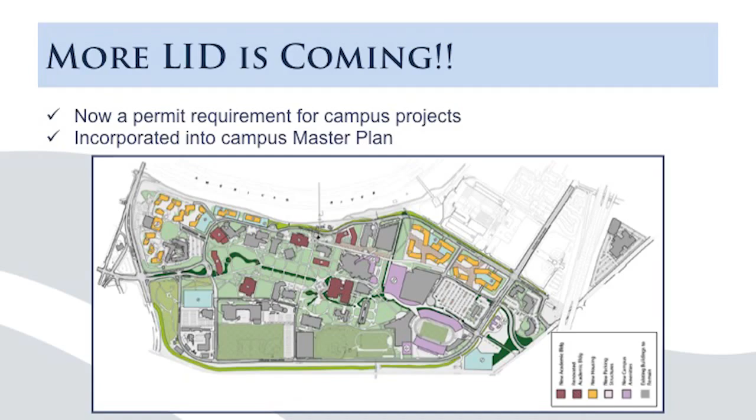More LID is coming to campus. Campus has now just been pulled into what they call Phase 2. It's a stormwater permit for small municipal separate storm sewer systems. Campus has requirements now to implement LID if a project is of a certain size. It's also being incorporated into the master plan. This green line here that you see is a swale that's going to run right through campus. It's a LID feature itself, but I imagine you're going to see a whole lot of these other LID features around the different buildings that come into play.

Okay, just rounding things out, talking again about think globally, act locally, managing stormwater for tomorrow's generation in the spirit of sustainability. LID is a site scale approach, so you have the opportunity to implement some of these things at home. Sacramento has a great website. It's a cooperation of the City of Sacramento, the County of Sacramento, City of Elk Grove, City of Folsom, City of Galt, beriverfriendly.net. They've got all kinds of information about river-friendly landscaping and being water smart, reducing water use. And here's our website where you can learn more about the project, and hopefully in a few months we'll have more information. And I have a slideshow of the finished product.